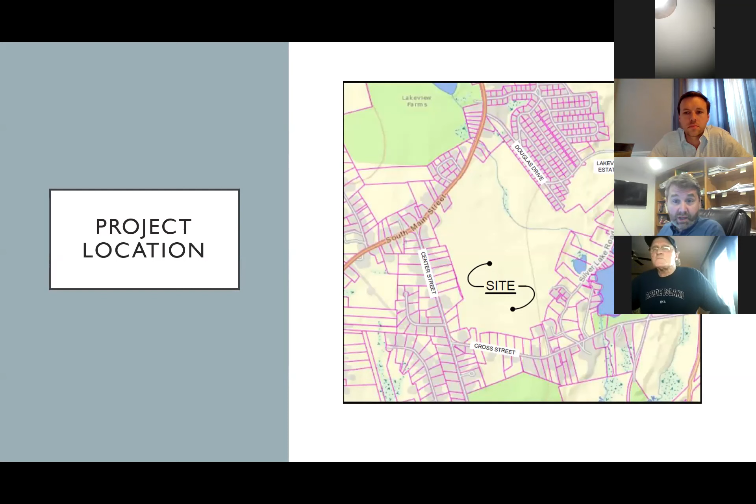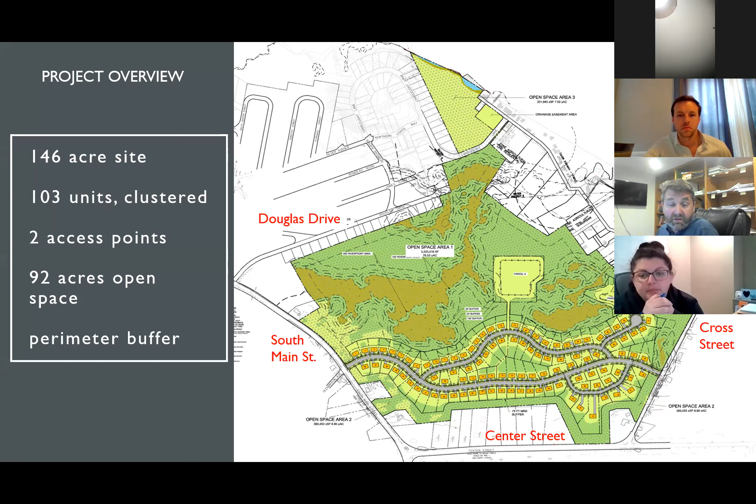Next slide please. So the total acreage we're talking about is 146 acres. It's a 103-unit proposed clustered subdivision in MRD. There'll be 2 access points, one on South Main Street and a second on Cross Street. As part of this project, approximately 92 acres of land would be preserved as perpetual open space. Much of this is forested land. There's wetlands that will be protected. There's a stream with a riverfront area, which will be completely protected. There'll also be a perimeter buffer around the whole property, providing screening and buffering for the project from the direct abutters, primarily on Center Street, and also the roadways which the project site abuts on: South Main Street, Center Street, and Cross Street. Next slide please.

As I said, there's approximately 92 acres of land that would be preserved as open space, divided into 3 areas. Area 1, the main portion of the site in the center, consists of about 76.5 acres of wooded land. Area 2 is approximately 8.8 acres, consisting of the perimeter buffer around the abutting properties on South Main Street, Center Street, and Cross Street, and we'll talk about that as we go on. The third piece of open space preserved is 7.62 acres in what we've been calling the triangle lot, which directly abuts Silver Lake. One thing to point out is that as part of this open space calculation, we have removed the area of the existing detention basin that was constructed as part of the Candlelight Lane project.

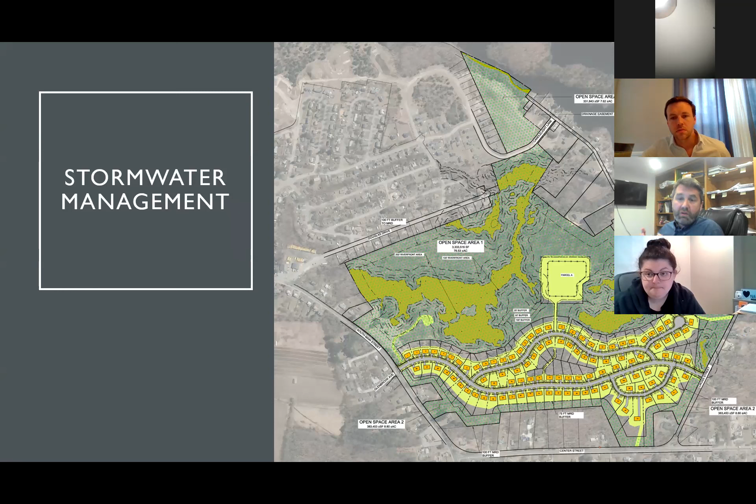As part of that, we have a decrease in both the rate and volume of stormwater coming from the project site in the post-development condition.

Just to give a little idea of where we're coming from on this: we understand it's in everybody's interest to try to minimize the area of disturbed area at any one time. So we've divided the project into 3 areas, the first being coming from Cross Street and moving into the site.

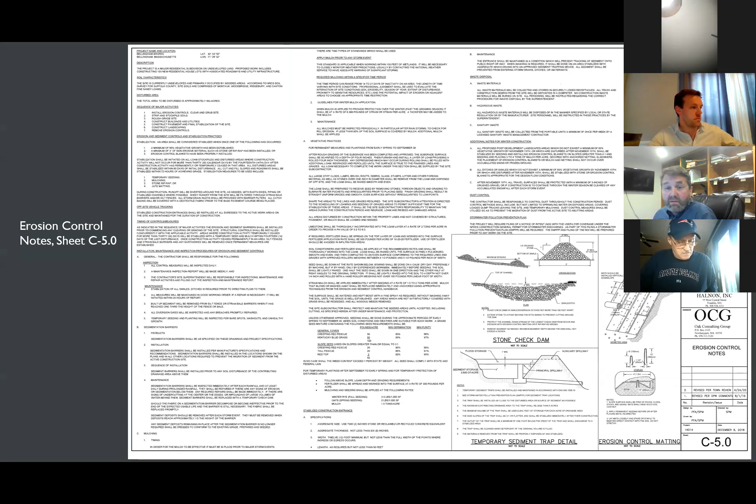This is just the plan of erosion control and some of the notes that was submitted as part of the plan. This outlines temporary seeding and stabilization methods, temporary sediment traps, things of that nature that would be incorporated into the construction.

We had gotten some comments from the board and talking with Jim and town staff about the perimeter buffer, the MRD buffer, principally around the abutting lots on Center Street.

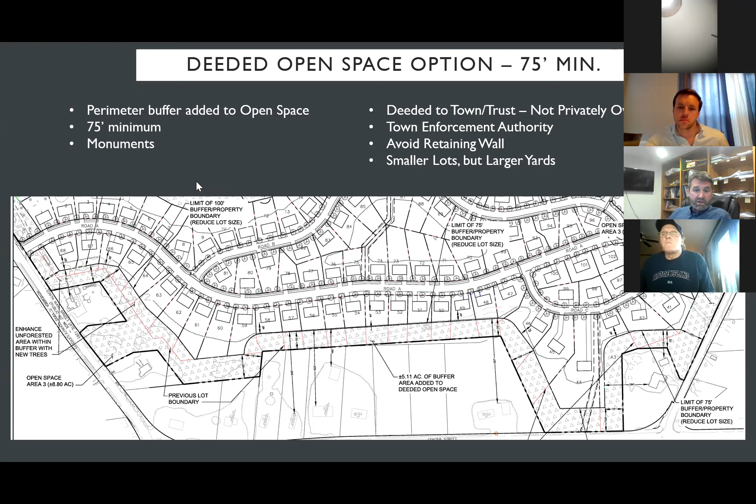It adds another 5.1 acres to the open space of the project, and we think it could be a better, manageable solution. We'd still have minimum lot sizes of about 10,000 square feet, which we feel is a good, minimal marketable lot for this area. So we'd be requesting a waiver to allow a 75-foot buffer in lieu of 100 in these 3 locations.

This is that same plan, but overlaid on an ortho photograph to give an idea of what's already out there. It's pretty well treed, and even in the areas where we'd be requesting the 75-foot buffer, there's still a significant amount of buffer and vegetation separating the abutting properties and structures.

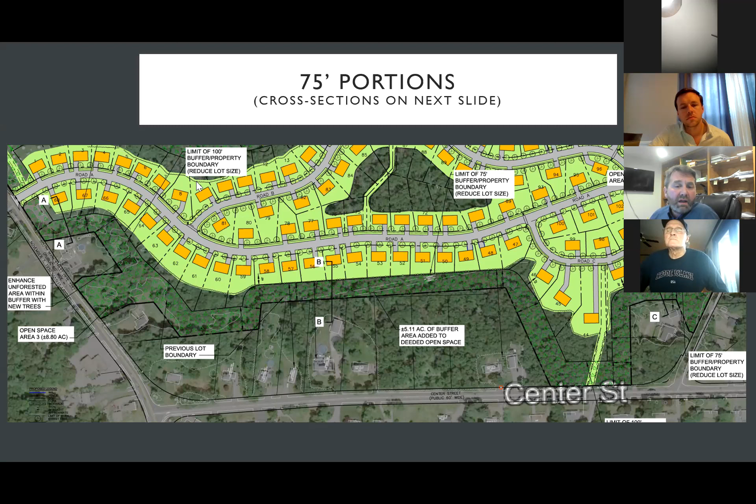So we cut 3 sections labeled here AA, BB, and CC. We can go to the next slide and show what we're looking at. This is the AA section, and we looked at the worst case scenarios.

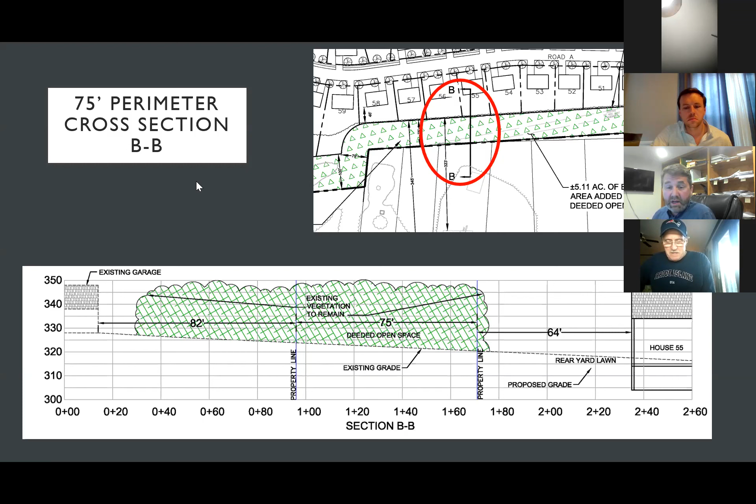In BB, similar situation. This also has some additional buffer on that abutting property — they have a garage at the far back of their property. But again, still a good, healthy buffer between the project and the abutter, and we're able to provide a decent backyard for the proposed house.

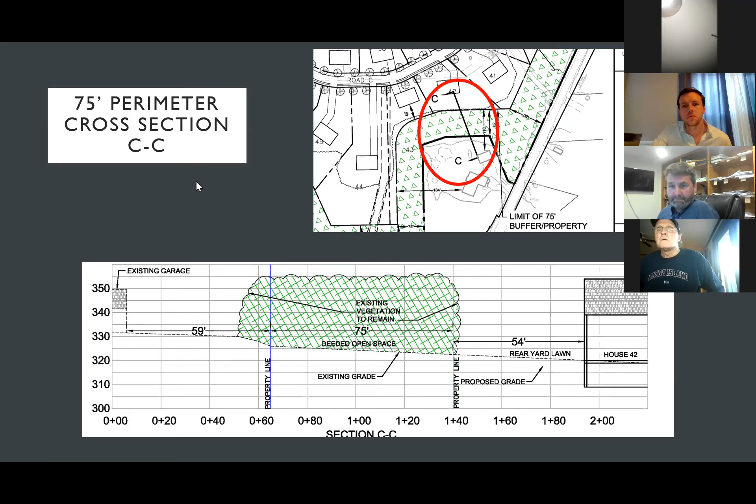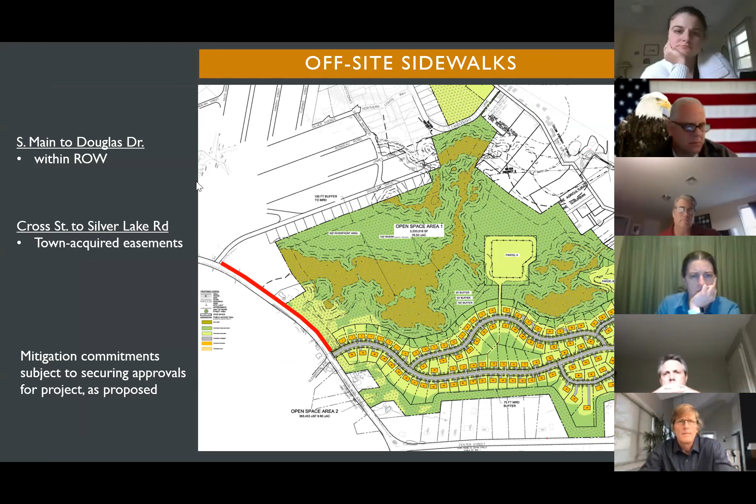As part of the project, we heard right from the beginning about pedestrian access and pedestrian travel. So we've developed plans for sidewalks from the project site, first on the left-hand side up to Douglas Drive. This is a fairly easy sidewalk to construct, all within the right-of-way, and the applicant has committed to do that as part of the project.

The other one discussed was down Cross Street, from the project entrance down to Silver Lake. We developed some plans for that, and in doing so identified existing encroachments into the right-of-way with driveways — it's a very narrow, strange right-of-way, for lack of a better term. But we've prepared those plans, had them reviewed by DPW, and they've come back with an estimate of approximately $400,000 to construct that sidewalk.

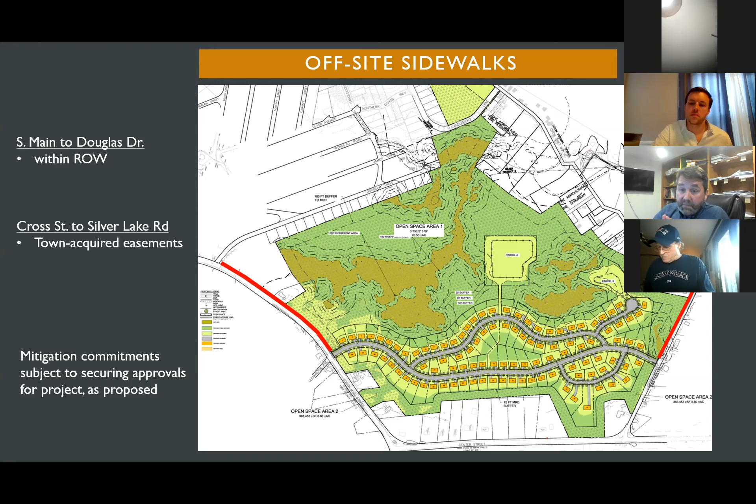What the applicant is prepared to agree to is they will construct that sidewalk down Cross Street if the project is approved as proposed. But we'd be looking for the town to obtain any necessary easements and permits for that. So again, we'd be willing to construct that project — $400,000 in value — if the project is approved as proposed.

With that, I guess before we turn it over to Kim to talk about traffic — Jim, do we want to ask the board about any questions on the site? It's up to you, would you care to continue, or do you want to stop for questions? Let's stop for questions from the board and the public on what we've seen so far. I'd like to start with Brian.

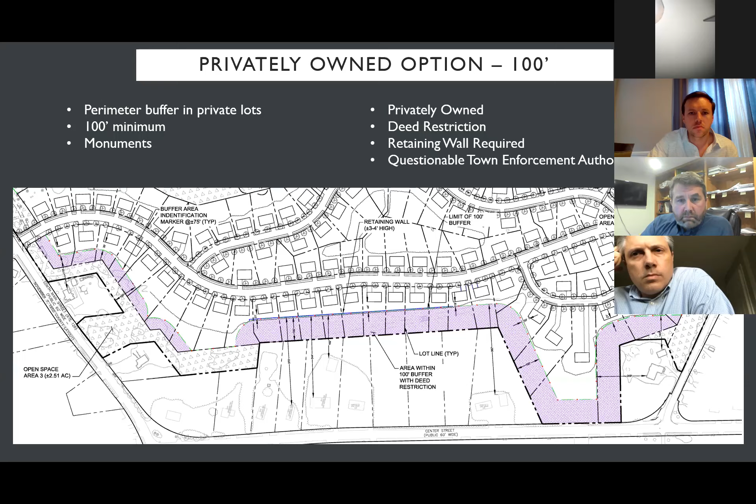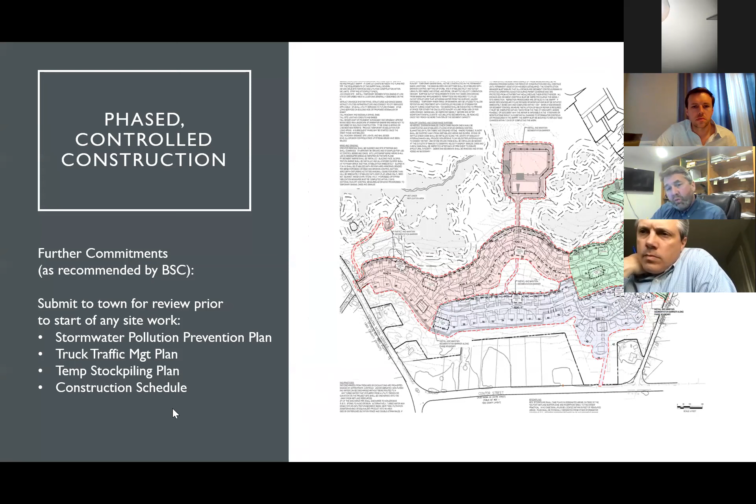Okay, great, thank you. So the green portion on the upper right-hand side, that would be the first phase, where the sewer and water are coming in from Cross Street. The stormwater management basin would be constructed, and the roadway and infrastructure would come into a logical point of ending. Then the second phase would be the pink, continuing the sewer, because it runs from South Main Street through the back loop and into that green portion out to Cross Street. That pink portion has the stormwater basin, get all that constructed and stabilized, and then move into the final phase, the westernmost portion of the project.

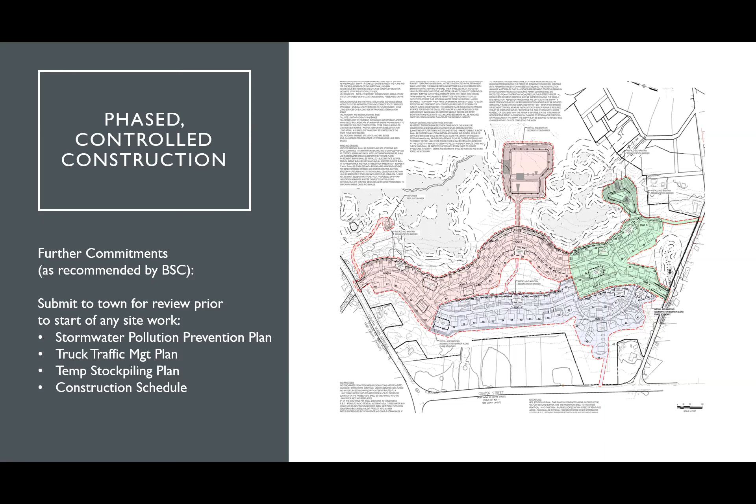Okay. I'm generally concerned about phasing a large number of homes in one phase, or a large swath of land, because in other projects we've run into the problem of phases being constructed and then stalled. I'm just concerned that the phasing might be a little too large. It might be something you want to look into.

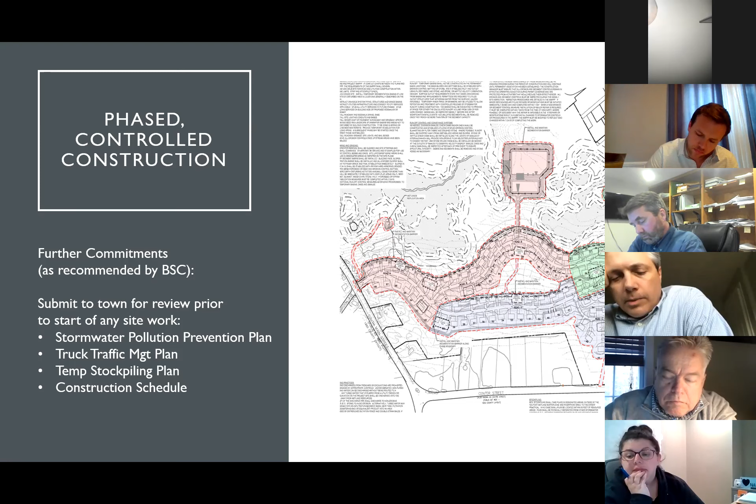In terms of, and this might be a little, well actually, if I can talk about the buffer, will there be a housing association? Jeff, can you respond to that?

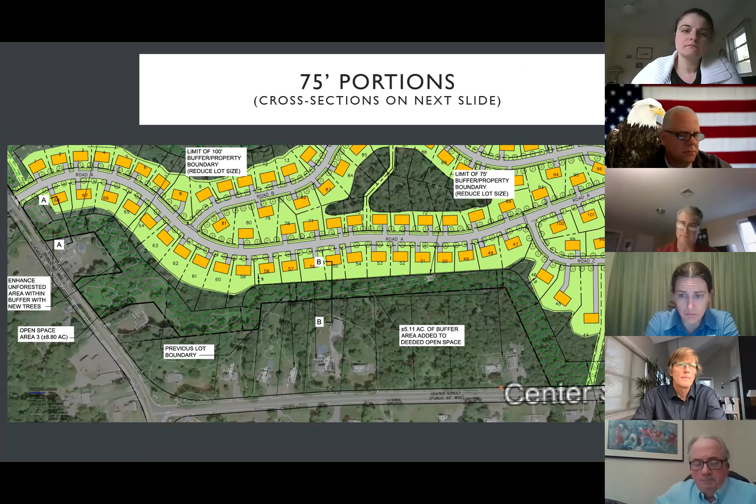I think there would be one to start with, but I think ultimately this is expected to be town streets. Yeah, I think that's right. So it depends how the town wants to handle the open space, the deeded open space, because in the zoning bylaw, the town has discretion as to whether it wants to take title to that area, for example through its conservation commission, which is when Sean mentioned that as the most likely scenario, that makes sense to me. If the town doesn't want to take title to it, the whole open space could be put into an open space trust, which would then consist of the homeowners. So that would be the only reason there would be a homeowners association, assuming the town is going to end up taking the roadway and drainage infrastructure here, which is what I think the town's preference is.

Yeah, I think it's always been contemplated that, as Sean mentioned, it would be an HOA at first, and then once it's completed, they bring it to town meeting, it gets accepted, and at that point it's turned over to the town for continued maintenance.

I appreciate the buffering. I think it's important for the people on Center Street to have that. I think practically speaking, and I'm open to suggestions, that 25 years from now, once the houses are sold a couple times over, people are going to forget that the strip of land between the newer development and the existing homes is conservation land. I'm kind of leaning towards having a physical barrier, like that wall that was discussed, and monuments and other things like that, along with the deed restriction. I think that's practically a better way of preventing a future homeowner from clearing that. But I'm open to suggestions.

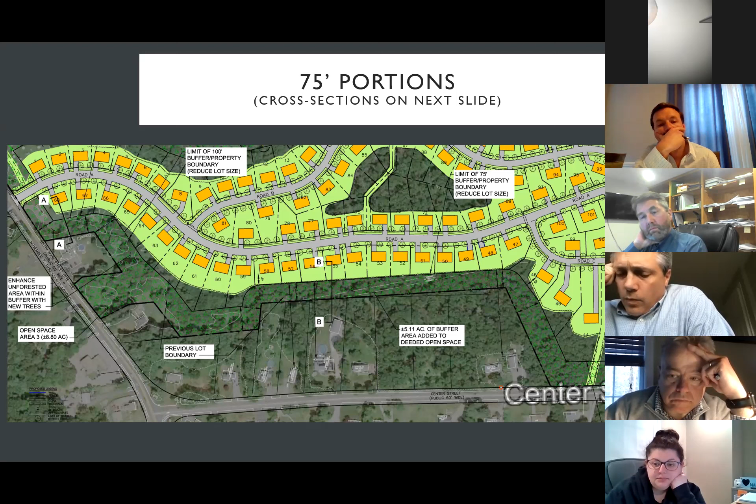And then with regard to the sidewalk on South Main Street, if I was leaving the project and taking a left out onto South Main Street, is there any plans to pave that, or is there a sidewalk from the project to Center Street?

No, there were no plans for that. So I'm not sure that leads anywhere. I think the idea with proceeding up to Douglas, it then continues on up towards the school, so there was kind of a destination.

Okay, and then just general comments on the layout of the property. I'd really like to see, and this could be premature, a bit of character to the neighborhood. I know the house positioning may not be exactly as shown now, but staggered homes, street trees, maybe more than the minimum. If you could give us the styles of homes that might be going in, a pocket park, things like that—something so we're not just seeing a row of new houses with two tiny trees in the front. You know what I mean? So something to that effect would be helpful to see as well.

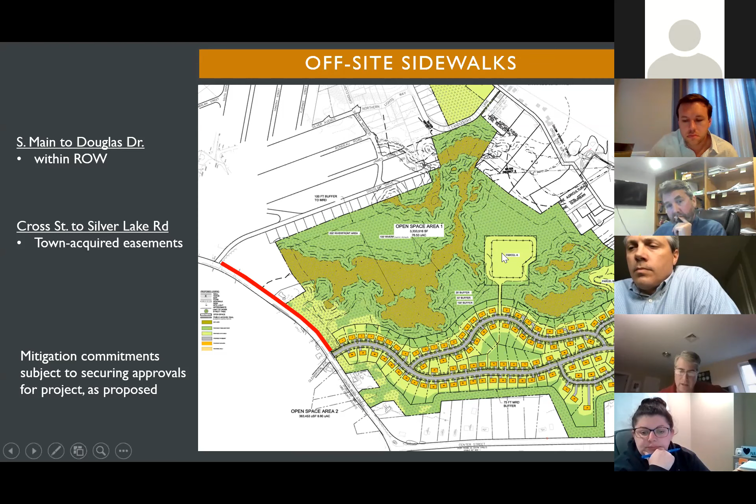Phil? Point of clarification on the major stormwater basin in the phasing—is that going to be constructed during phase 3? That's part of phase 3. Is that correct? Phase 2. That one would be part of phase 2. And then we would have the other basin as part of phase 1.

Okay, I guess I would probably like to hear from peer review at some point about the water flow during construction, only because the major stormwater feature of this site would not be up and running for the first phase. I understand the first phase does have a basin over there, but it's not the major basin of the project.

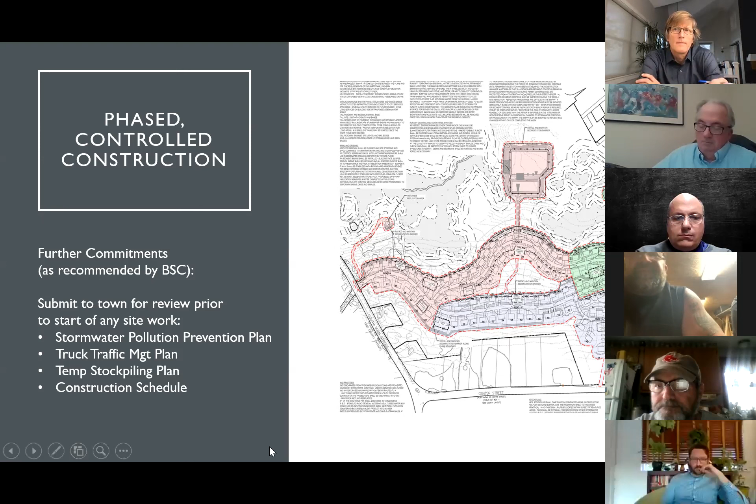And you may not have an answer to this, but I know in other communities they're starting to need to submit COVID-19 safety regulation reports for construction sites now. Is that something we're going to have to address moving forward? Possibly. I mean, like everybody, the crystal ball is cloudy right now, but we anticipate as a condition of this approval we'll have some pre-construction requirements like the traffic management plan, the temporary stockpile management plan, the construction schedule, and as part of that, a COVID-19 plan may need to be developed as well.

Okay, anything else? No, that's it. Thank you, I have quite a few questions. I want to thank you for working with us on the test pits, and I said I have quite a few. This has been floating around, this development, for how many years?

Wow, this has been going on through one iteration or another? Yeah, I haven't been involved in that, but I would say in various forms for a decade plus.

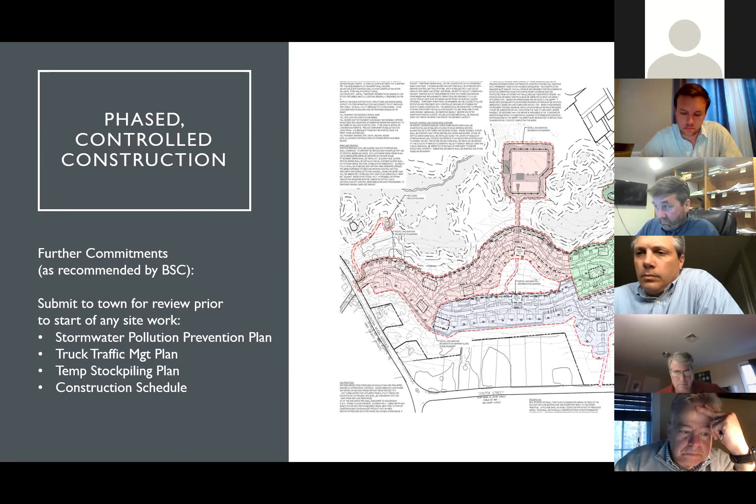In a strange way, you have a confluence of events that may benefit you, and I think we need to address that. With this taking so long, being in the COVID environment right now, we're going to see a lot of people want to leave areas with dense populations and move out to quieter areas with bigger backyards. The reason I bring that up is the buffer area.

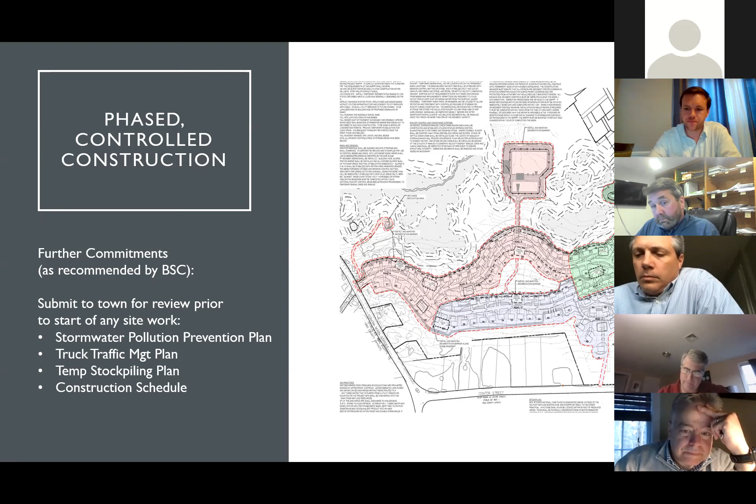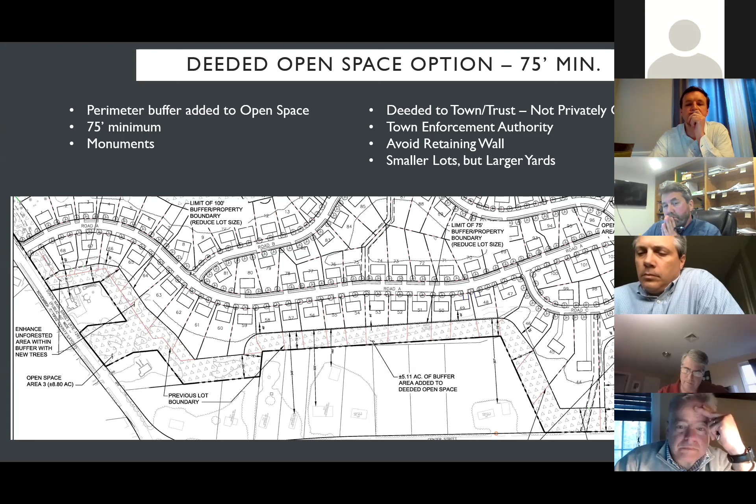The way you count the buffer area on the 100-foot buffer sort of bothers me. You're counting it as a buffer, but you're also reducing it as usable land for a homeowner. So in essence, they're going to maintain it, but they don't really own it. If they want to put a pool back there or a hockey rink on a quarter-acre lot, you're somewhat restricted. The concept of counting it twice sort of bothers me.

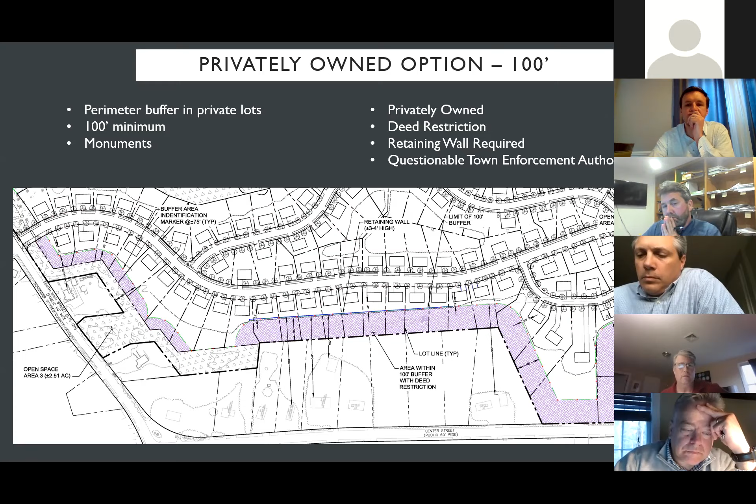In regards to counting it twice, Jim, can you go back to the original map? Keep pointing up to the area up the north middle, the infamous triangle. That area has been part of one development, part of another development. Jim, where do we stand with that right now?

So I did sit down with Sean after our last meeting because we knew the board had some concerns about that, and we pointed out some concerns too. Sean has gone back and gotten the accurate as-built of what's out there today. So that detention basin has expanded quite a bit over the years for the abutting project, and what they have there now does accurately reflect what's out there.

So the carved out gray area in that triangle, which I could try and point out, reflects the riprap and the detention basin and what have you there. So as we see it, that green does accurately reflect what could constitute open space, granted it was heavily disturbed during the last project, or the current project ongoing right now.

So are they counting it once or counting it twice? So, I mean, technically they're counting it once. It has been disturbed already, but it's only being counted for one project now.

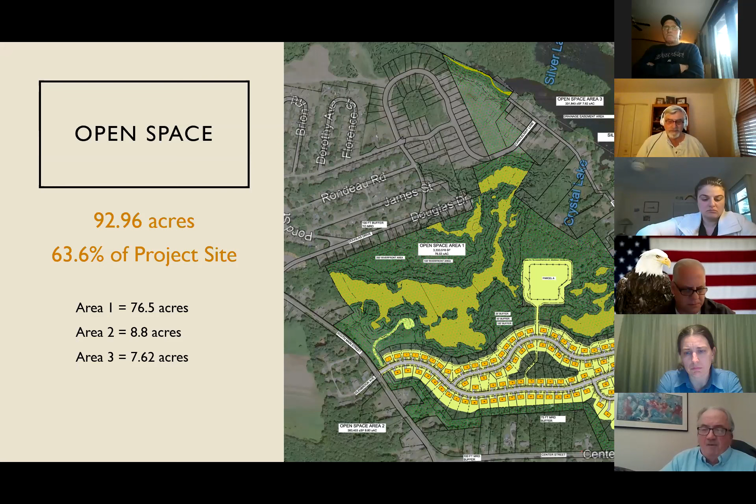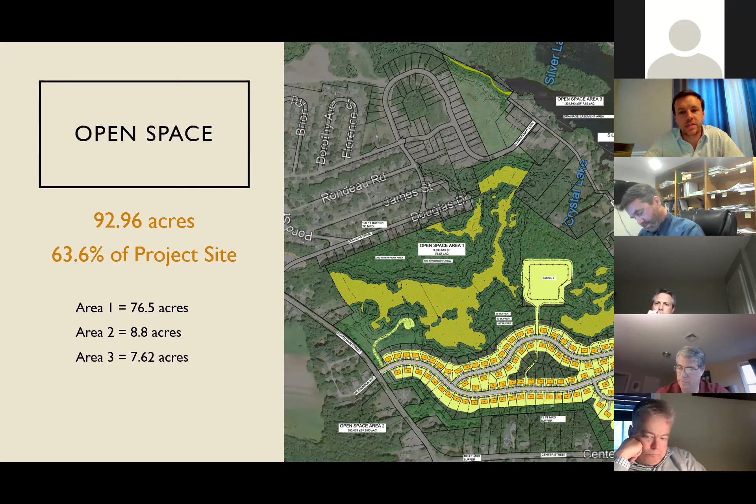Yes. Also, Jim, performance bonds, will that be part of this process? Yeah, so this is more of a standard subdivision, though it's clustered in a special permit. It is a subdivision, so in a typical subdivision, as the board knows, we would require a security early on. Once they get most of the infrastructure down and start asking for occupancy permits, we would be requesting a bond.

At this point, does the public have any questions about what they've seen so far about this, prior to talking about traffic?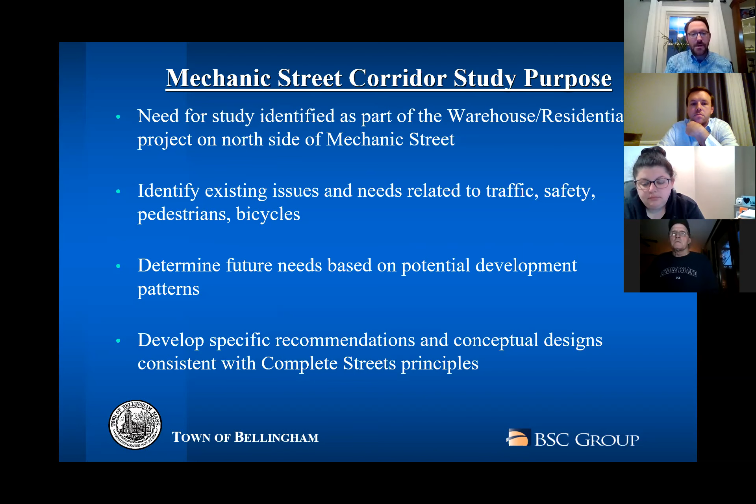One of the things we tried to do with this study is keep in mind that if our recommendations move forward, there will probably be some MassDOT funding. So we wanted to put together recommendations that can be funded and implemented in the event you need MassDOT funding. That includes incorporating complete streets principles, staying consistent with their bike plans and pedestrian plans.

As an overview, the corridor we studied is about two-thirds of a mile. It basically goes from Blackstone Street in the west to the intersection of Maple Street in the east, all the way to the Franklin town line. As most of you probably know, it's a major commuter route. There's extremely heavy traffic volumes in the eastbound direction during the morning, and again the reverse in the evening. It's one of the primary routes for people to get to the commuter rail station and 495.

We also took a look at the cluster of signals in the town center. We didn't focus too much on that during the study since that's being designed right now, but we did look at the analysis of those intersections to see if the proposed recommendations and design will work. Right now the right-of-way dates back to the early 1900s. It's 60 to 80 feet wide, so there's a good amount of space.

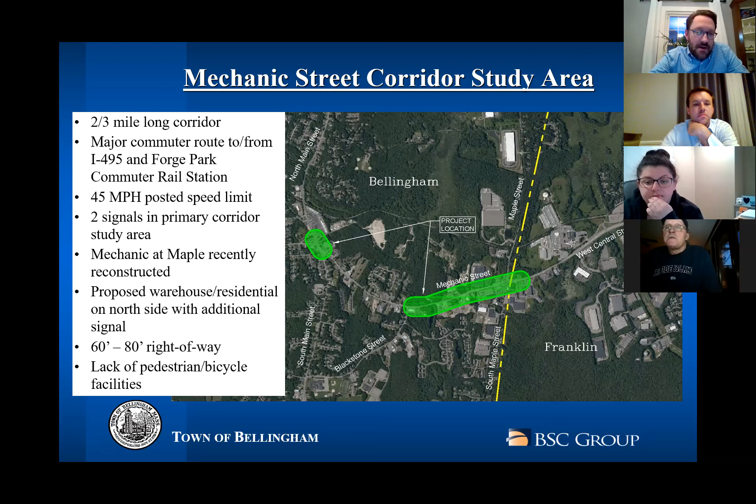To date, we started out meeting with the town - Jim and other staff members, police and fire and engineering - just to get their sense of what some of the issues are out there. We did visit the corridor to do some field visits and take photographs. We walked the corridor with Jim just to get a feel for what some other issues might be, so we don't overlook anything.

We looked at some existing traffic volume data. We didn't do any traffic counts for this - we used what was done as part of the warehouse study. I think those were conducted in 2018, so they're pretty new.

We identified all of the existing issues, including traffic operations, safety, pedestrian facilities, and bike facilities. We worked with the town on identifying what can be built out there, and some of the other sites that are kind of undeveloped or could be redeveloped. At the end of this presentation, we'll show you a couple of concepts we came up with that can address most of these issues we've identified.

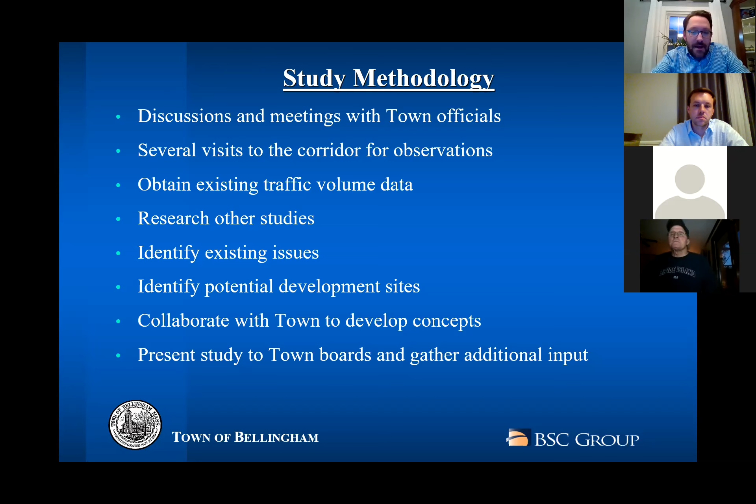Right now we're in the final phase - we're just presenting this to the town boards. Any additional input would be great.

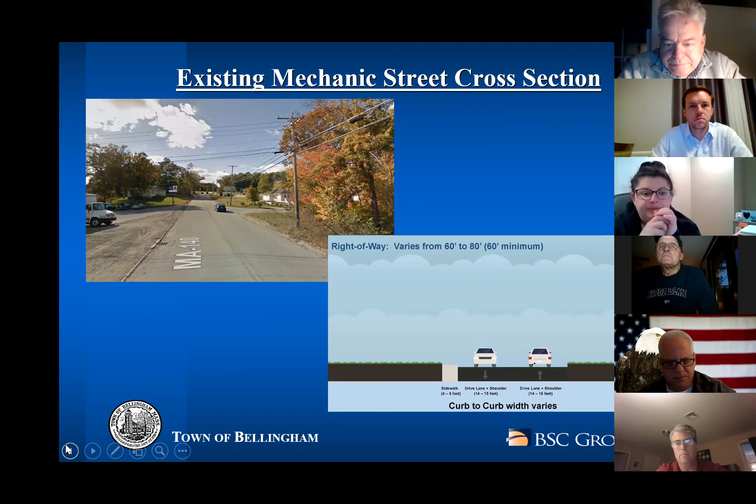So just to start off, this is Mechanic Street. It's basically two lanes, one lane in each direction. There are really not any sidewalks throughout the corridor, except around Blackstone Street, and then towards the east side around the commercial area. So pedestrian facilities are lacking here, and with the potential developments, that was one of the key issues we tried to address.

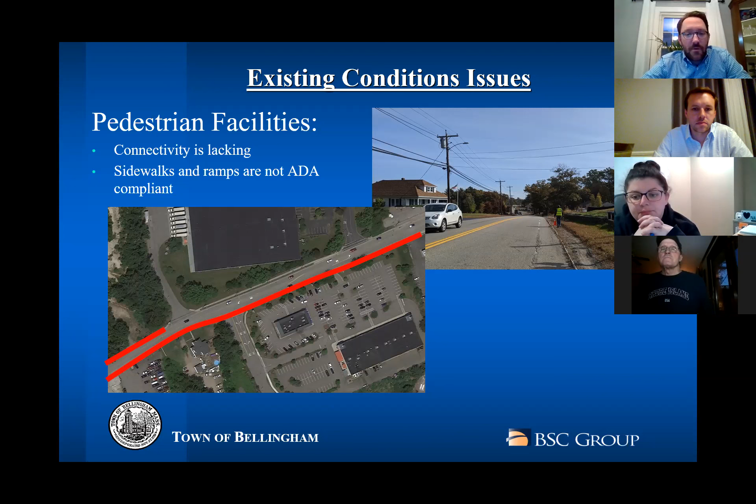So we'll go through what we found. As I said, there's not much in the way of pedestrian facilities - there's really no sidewalks anywhere. From what we heard, some people do walk from towards Blackstone Street and even the town center all the way down to this area. There's not a lot of pedestrian activity, but that could change in the future with what might be built here. Again, nothing's ADA compliant. Where there are sidewalks, they're crumbling, with the exception of the east side of the corridor that was recently rebuilt - so there's pretty good facilities there.

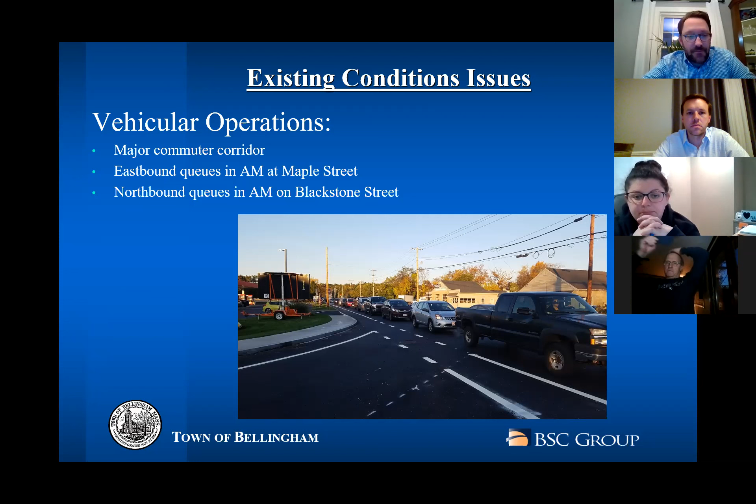Again, major commuter corridor - this is just a picture we shot in the morning. This is the eastbound approach at Maple Street, right near the Rapid Refill. This was one of the major points of congestion we looked at. This was recently reconstructed, and when we went out there it was under construction - I think one issue was that the detection may not have been installed yet. So we're hoping this congestion will clear itself up a little bit. It's still going to be a major commuter route, so there will still be some levels of congestion, but what we were seeing is queues that would back up a couple thousand feet and take 3 to 4 cycles to clear through.

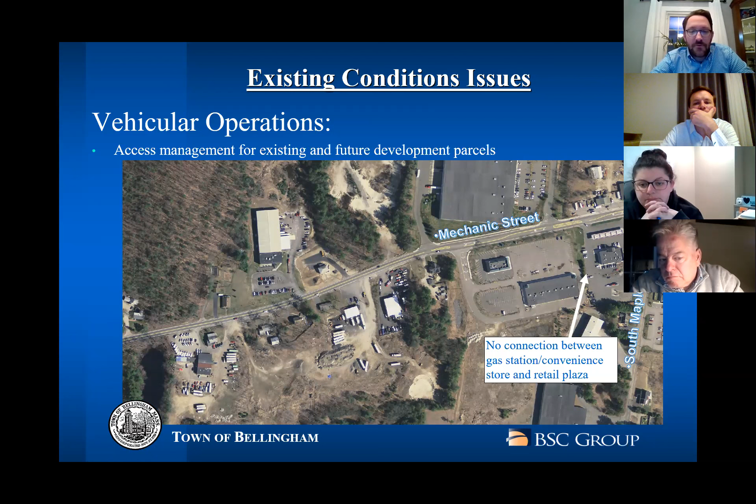So another thing we saw, on the right side, is the intersection of Mechanic and Maple Street. You have the rapid refill with the Dunkin' Donuts there, so there's a lot of activity in the morning. It's adjacent to this retail parcel with stores and restaurants, and there's a lot of interaction between those two sites, yet there's no way to get from one to the other without actually going out onto Mechanic Street and driving like 500 feet. That was one of the issues we saw with access.

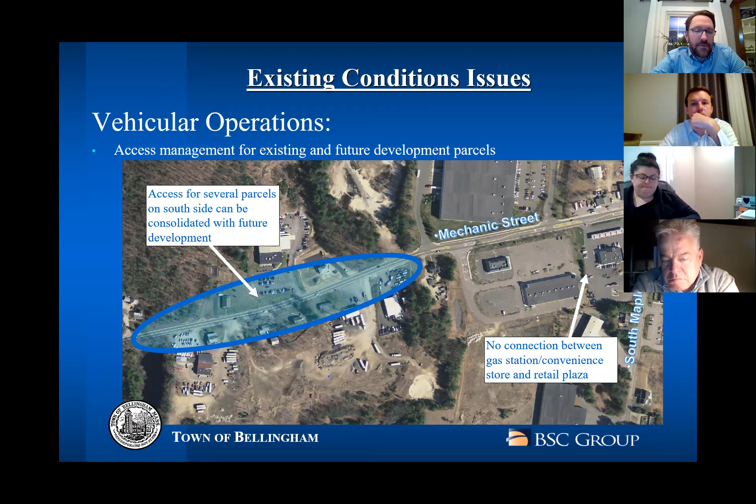So we identified this location as somewhere we can clean up the access points and reduce them. I think there are probably 6 or 7 access points to all the individual parcels, and I think those can be consolidated into 2 locations.

Safety - we looked at MassDOT crash data for a 5-year period. The 3 hot spots, probably not a surprise, are at Maple Street, at Blackstone Street, and in the town center.

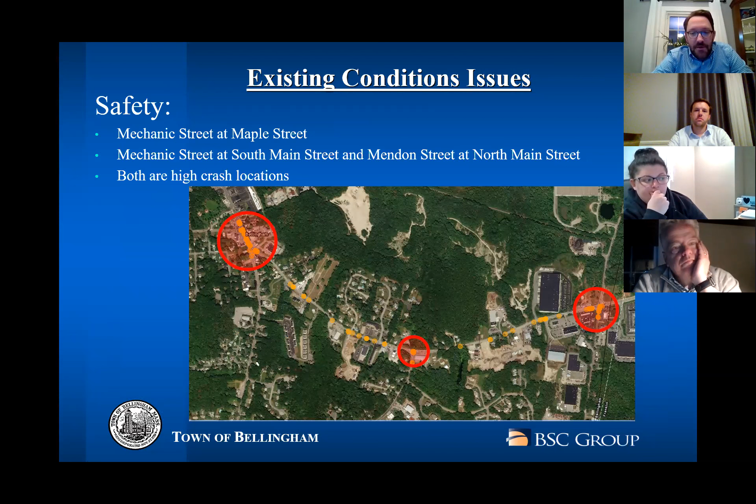There is that project at Maple Street, which hopefully will clear up some of the safety issues and some of the congestion. The same thing at the town center. And then again at Blackstone Street, there are some sight distance issues that we saw there.

There is some significant congestion, especially during the morning, for people traveling north - I assume they're coming from South Main Street to Blackstone Street to go east. There was 1 fatality there, so we're going to look at safety issues at that intersection as well.

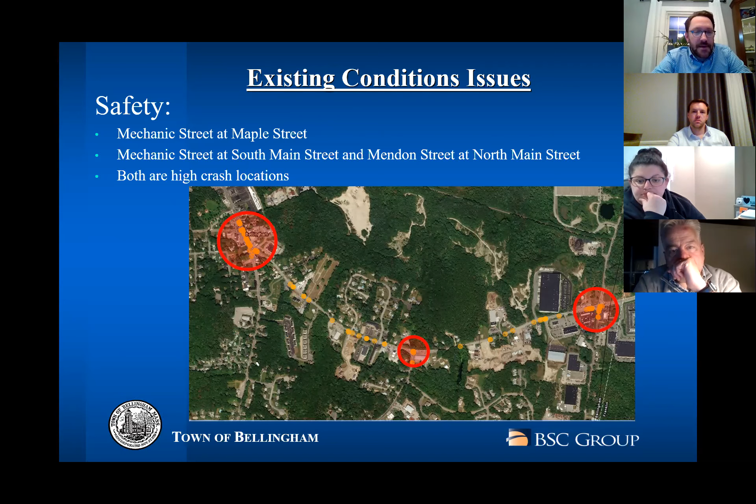As I just said, there are some sight distance issues, mostly due to vertical curvature. What you can see here on the top is a plan view with Blackstone Street on the left, Maple Street on the right. If you see the red and yellow areas, those are areas where there's not enough proper sight distance based on the American Association of State Highway and Transportation Officials standards. So all of those locations do not have adequate sight distance.

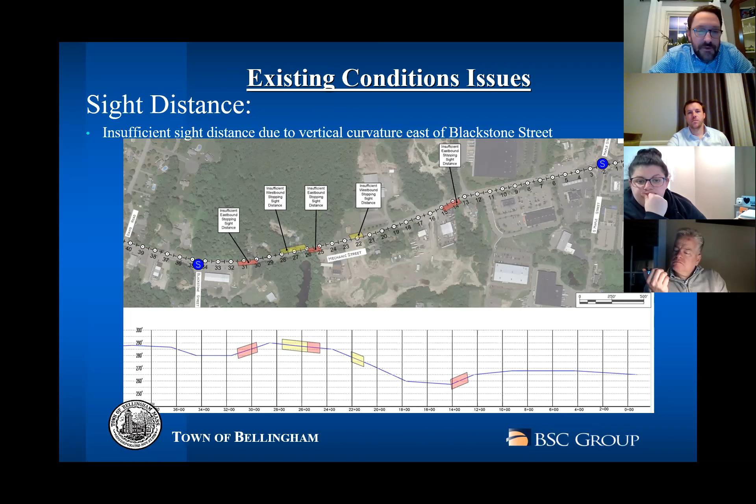There's a couple ways to fix that. One is obviously to reconstruct the entire road. The other is to put some warning signs or devices to alert people that there's going to be driveways, traffic signals, and other activity. So that was one thing that we looked at.

As I said, a couple other issues - bike facilities don't really exist here. There's some bike lanes at the intersection of Maple Street, but they don't really connect to anything. After talking with Jim, one of the goals is to connect to other bike facilities in the area, especially the one to the south, the Southern New England trunk line that runs east-west through a few towns, and then also out to the commuter rail station.

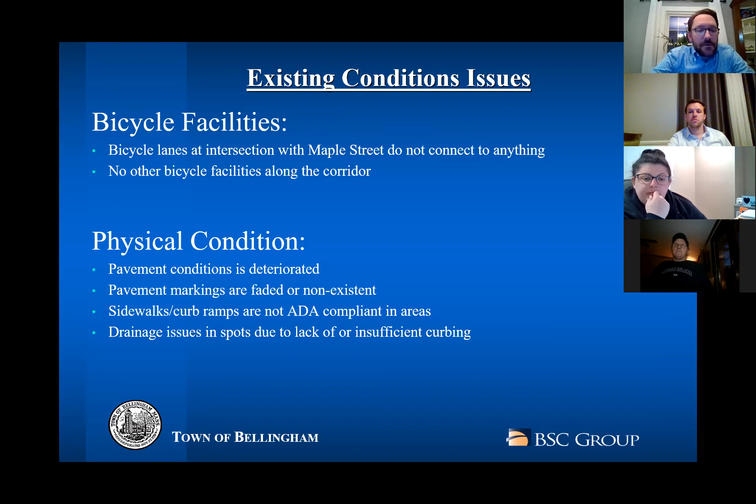Another thing we saw was the physical condition of the roads - they're pretty deteriorated, pavement markings are faded. There's some issues with drainage, which I think are related to there not being curbing out there. It looks like the road's just been paved over, and now the curb is maybe an inch or two where it should be a lot higher. So those are some of the issues that we found.

Just to go back to potential development sites - in the traffic study, we took all of the traffic volumes from the warehouse traffic study, built them into the future 7 years, and added the 1% growth. This is basically the same methodology you just saw with the previous presentation.

Then what we did is look at what could possibly be built on all of these locations. Number 1 represents the warehouse site - that is happening. As you can see on the bottom, 6 through 10, we looked at what could possibly be built there. That was information given to us from the town. Then there's a cluster of developments.

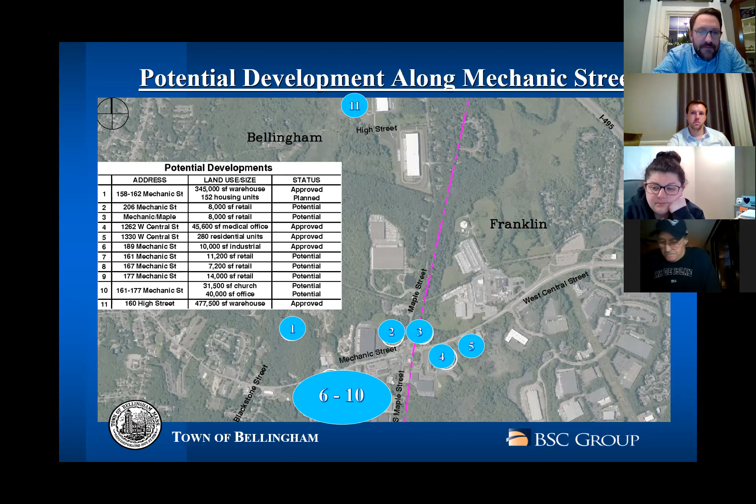There's a couple of sites in Franklin on West Central Street that we also incorporated, and a couple sites just on the north side of the Mechanic Maple Street intersection that could see some additional development. So we incorporated all of that traffic and projected it out 7 years from now, though that timeline can change, just so we were able to account for enough traffic growth.

So I'll get right into our designs, because this is the meat of the study. We came up with 2 different options. Both include upgraded pedestrian facilities and upgraded roadway. I just want to point out one thing.

As part of the warehouse study, some of their mitigation will be to build a sidewalk from their new traffic signal, which will be to the east of Blackstone Street, connecting to the existing sidewalk that runs in front of 190 Mechanic Street. That sidewalk is incorporated into our plans, but I want to let you know it will be funded separately by the proponent of the warehouse project.

This first option shows sidewalk on the north side, so the left side of the screen is the north side of the road, the right side is the south side. We have the sidewalk, which will be constructed either way, 2 drive lanes, and on the south side, where there could be additional development, we're showing a shared use path, which will accommodate bikes and pedestrians alike.

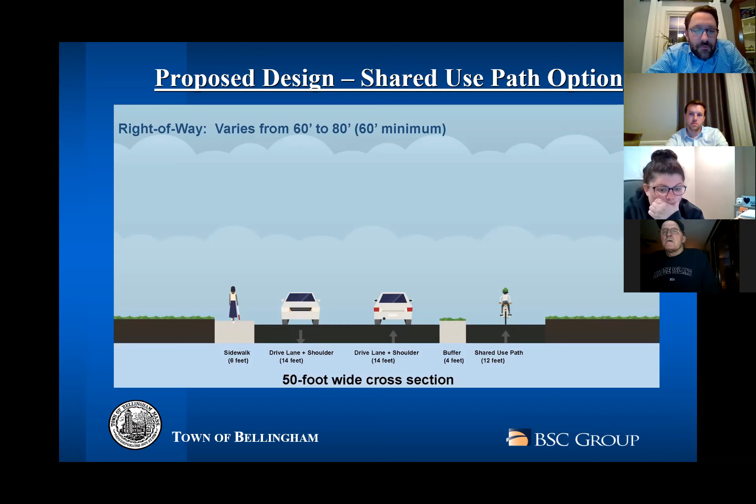The dimensions could change by a couple feet here and there once you get into final design, but this is a 50-foot cross section. The right of way is a minimum of 60 feet, so this can fit within the right of way pretty easily. We'd probably have to shift some curb lines here and there.

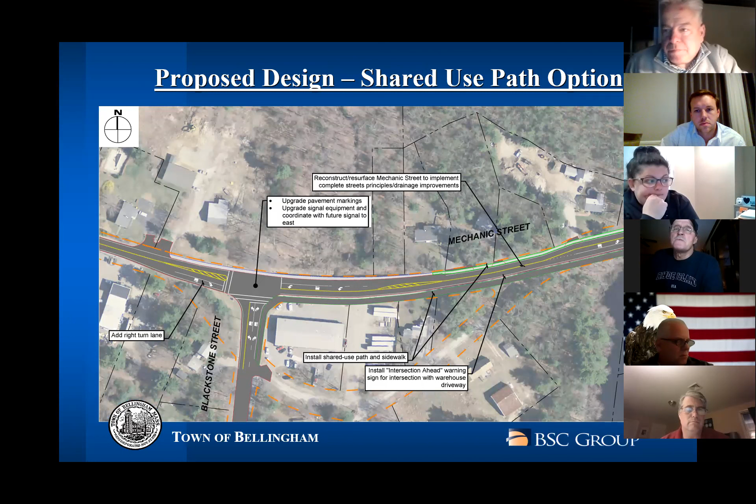So we'll go through this. This is the detailed plan view starting from Blackstone Street in the west, and this will go a couple feet to the east. Right at Blackstone Street, we found some capacity issues. There's a pretty heavy right turn movement in the eastbound direction, and looking at the right of way, we felt it's possible to add a short right turn lane there that can add a little bit of capacity to help out. Not too drastically, but I think it might help.

One thing we're going to do is upgrade all of the pavement markings and signal equipment here. We're recommending that this intersection be interconnected with the future signal at the warehouse driveway. I think you'd see some benefit from coordinating those 2 traffic signals, especially because this is the area where there are some sight distance issues, and you want to prevent people from having to stop when there are sight distance issues.

Again, on the south side, you see the shared use path extending from Blackstone Street to the east. We're proposing to reconstruct all of Mechanic Street. With that, you'll get some drainage improvements, upgraded pavement, and better pavement markings. We're recommending full depth reconstruction, not just a resurfacing of the road. This should last decades.

You can go to the next one. Again, as we go to the east, on the left side of this graphic we're showing the proposed warehouse driveway. We're not showing it going into the site, just showing its location. And as I said, on the south side you can see the scattering of parcels.

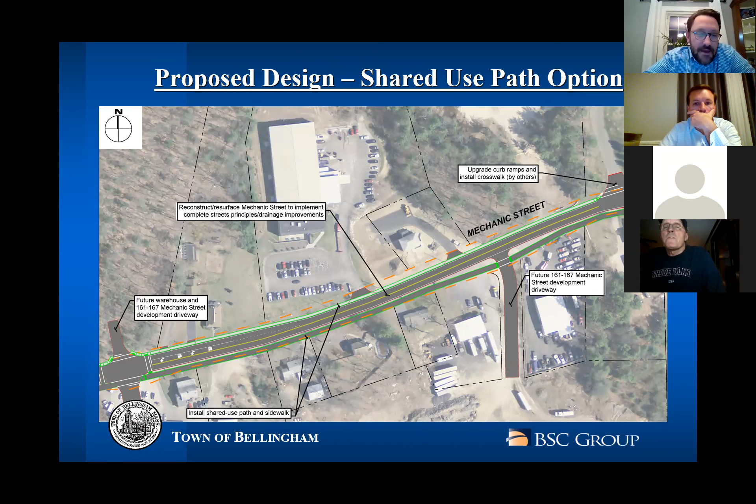There are all these small parcels that can be built. We're recommending to the planning board that if any of those projects go forward, you'd benefit significantly if they can be developed together as much as possible. If they are, you can have some control over site access, providing a couple access points to all of those parcels.

Obviously, one obvious location would be opposite the warehouse driveway, so you can incorporate that right into the signal, and you can put a left turn lane there if needed. These are design elements that'll have to be determined as other developments come on board, but based on what we saw, you can put a left turn lane there as well. The second point of access would be towards the eastern side of those parcels, which is in a pretty good location for the sight distance issues as well.

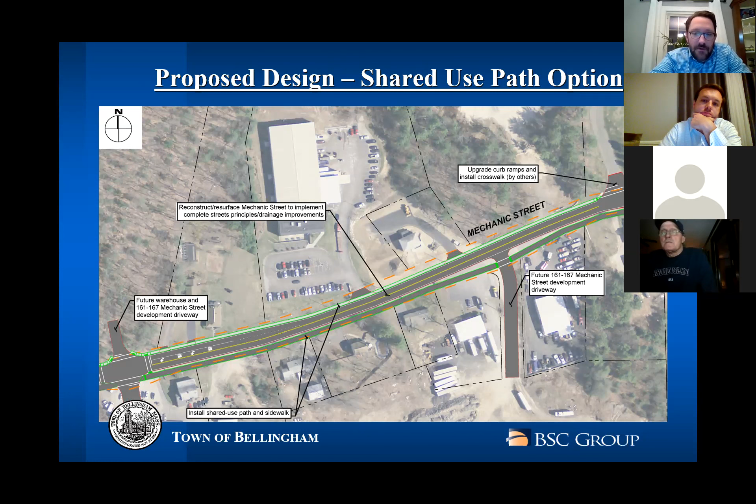As we go further to the east, we're recommending just installing some crosswalks where they're missing, upgrading all of the curb ramps where they're not ADA compliant, and that's most of them. But again, this area has recently been reconstructed, so it's actually in pretty good shape. We're not making too many recommendations here.

There's a short little pocket that goes into the rapid refill. It's not really striped or anything, so we're just recommending delineating and defining that a little bit better. I know there's a lot of activity there during the morning.

Again, the shared use path will continue through the frontage of this retail plaza. Eventually it'll have to end in front of the rapid refill, where it can be converted into a bike lane, which currently exists at the intersection of Maple Street, and then continue on to any other future bike facilities that might be built or installed.

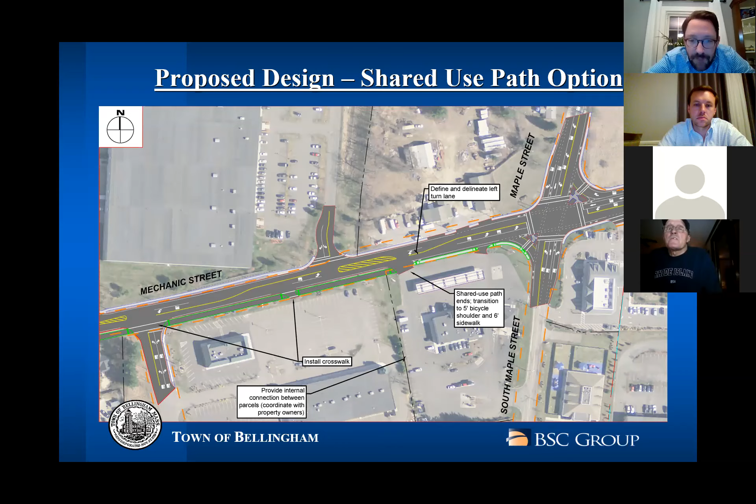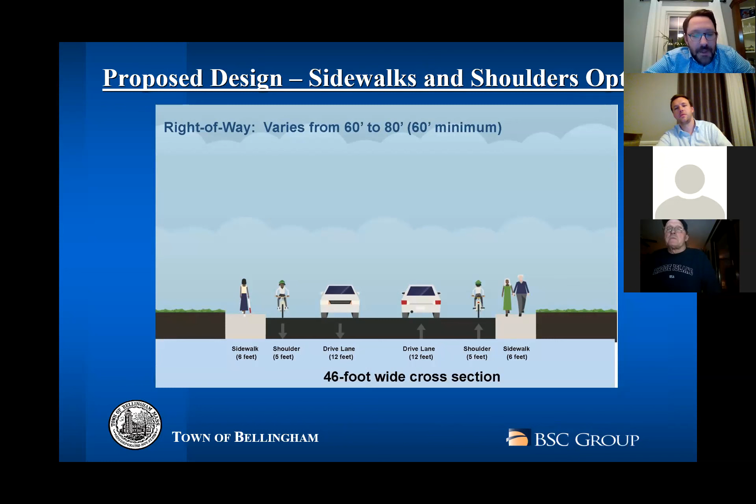Right now there really aren't any shoulders on Mechanic Street at all. What we're doing is installing 5-foot shoulders that meet the requirements you'll need for complete streets and bike facilities. Even if you're not expecting a lot of bike activity here, it's still something that, especially if you're getting funded through MassDOT, they'll look for.

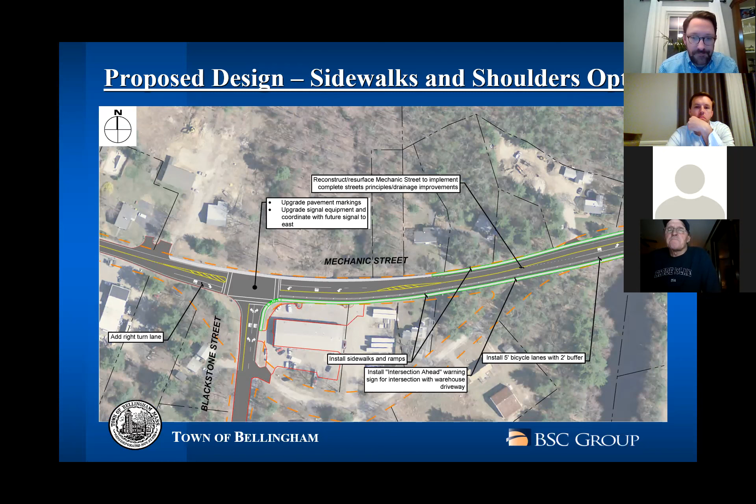A lot of the other elements are the same, though the cross section is a little different. You see the same improvements here at Blackstone Street with the right turn lane, the same connection to the proposed traffic signal at the warehouse. But on the south side, we have a bike lane. There's a buffer there just to give bikes a little bit more room, and it also serves as a shoulder as well.

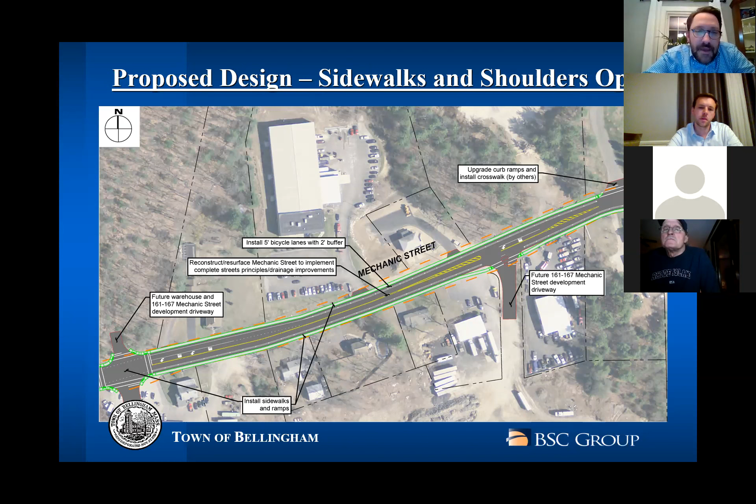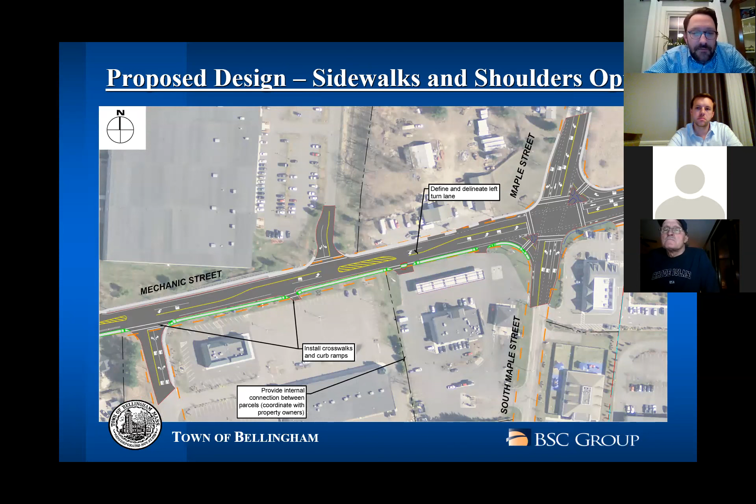So this is pretty much the same as the last concept we showed, except the bike lanes are carried through, separated by a buffer. We're not making any preference for one option or the other. I think this is up to the town to decide. Both will work, and I think both are going to provide good bike and pedestrian connectivity.

So the next steps, we're going to continue to work with the town, collect some input, maybe even input from tonight. We did some cost estimates, so in total, depending on the option, it's going to range from $3 to $3.5 million. That includes the full depth of reconstruction. It doesn't include any subsurface utility work like replacement of water lines or wastewater lines or anything like that.

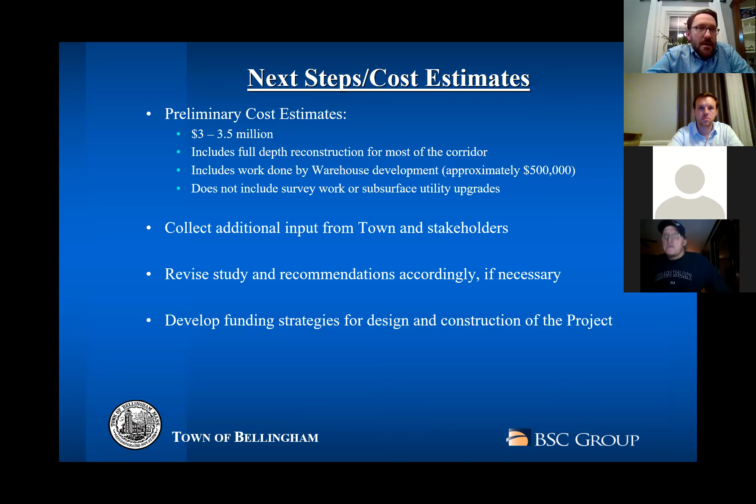That estimate also includes work that will be funded by the warehouse developer, the sidewalk and signal upgrades and other stuff they're doing. So once we get a couple good concepts after we sift through any input we get, we'll work with the town to figure out how to actually get this funded. I expect it'll be a combination of mitigation funds from future development, and also putting together some funding mechanisms in terms of grants from the state or other government agencies.

So that's about it. Welcome any questions or input or anything else.

Well done, sir. Thank you. Very impressive.

One thing I will add, as Mike touched on, much of this is going to be related to mitigation. Obviously the town doesn't have funds to put down 3.5 to redo Mechanic Street, but as we all know, there's significant areas for redevelopment, as Mike showed on the aerials, and so this is really a plan that we can take and just hand off to developers that are interested in coming to town and say, this is what we're expecting.